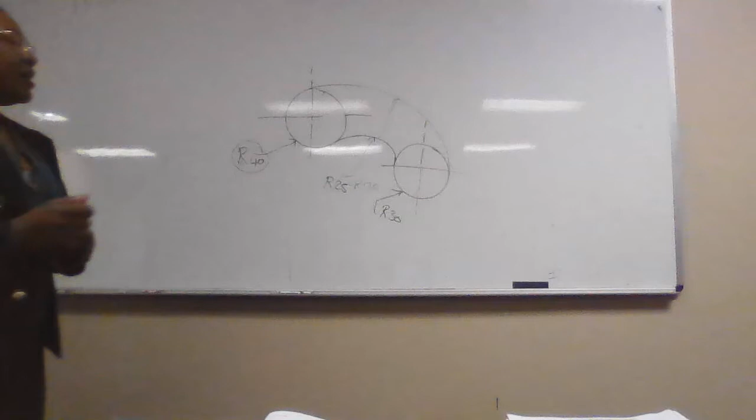We have that circle that will belong here. You open your compass to 40, put here, draw. You will go to that center mark, open your compass to 30, draw.

Now we have two arcs without center marks. I told you that for you to know whether it's internal or external, we have two types: either internal or external. The external arc is an arc that when you complete it, you see this blue one, if I complete it, it was initially like that.

It's touching the two circles externally from outside. So we need to add the radius, meaning the radius of this external arc plus the radius it is in contact with on one side. On the other end is 25, which is the radius of the arc, plus another circle it is in contact with. It's like a person, you've got a hand, you touch someone here and someone there. You are touching two circles there.

So the first part is 25 plus 40, which is 65. Next is 25 plus 30. For all external circles, I think this shape you can now look at.

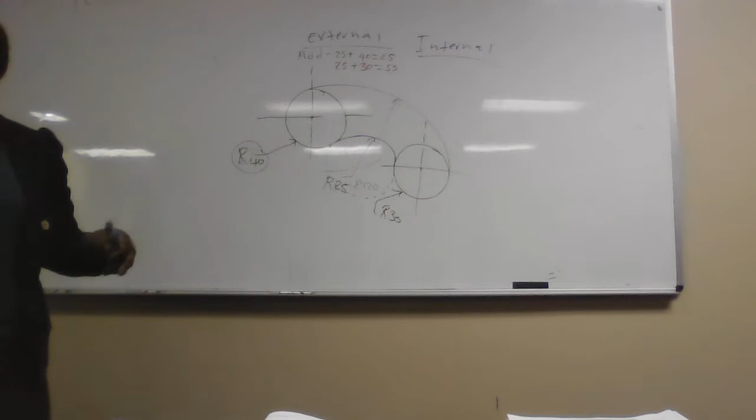Where they meet, that is where you are going to go and open 25, and it will perfectly touch without leaving a gap, without going inside the circles. If you see there's a gap left, or it's going inside the two circles or one circle, it means go back to your calculation, or else your compass is moving. There's no way it can fail to touch. For all your external fillets or arcs, I'm revising, I'm not teaching this part.

For the internal arcs, these are arcs that when we complete, can you see what's going on here? Look at that 120 radius circle. It's going to enclose the other two inside. It's an internal arc, and the opposite is you subtract.

The radius of the arc minus what it is touching, radius of the arc minus what it is touching. So what's the radius here is 120. You are going to say 120 minus 40, what's that? It's 80, right? Then 120 minus 30.

Then you open your compass to 90 or to 80. Put, well, which one is 90? This one? Okay, you open your compass to 80 and put here. Why here? Because that's the radius of the circle I'm subtracting. 90, I put here, I strike. What's this? 80, right? 80 here for this one, 90 for that one. I strike.

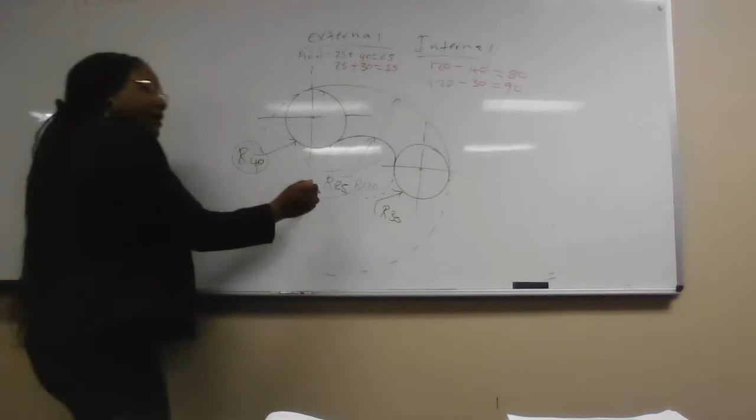And then you come here, open your compass to 120, then you draw. As easy as that.

You say how long this should take us? To copy this one, this is 25 marks, 25 minutes, 30 minutes maximum. You don't finish, leave it, go to another question. Otherwise, 4 hours you will be just wasting time on this one. Give yourself time. Even the one I'm starting tonight also is 25 marks. We expect you to spend not more than 40 minutes, not even more than 30 minutes. When you see that 30 minutes is approaching, leave it, go start answering other questions, because whatever you put there, every line of work is counting in drawing.

We're counting you on neatness, accuracy, correctness, those things. So make sure you don't perfect on one, you will end up going home with one question. And that's the mistake students are making on all the modules.

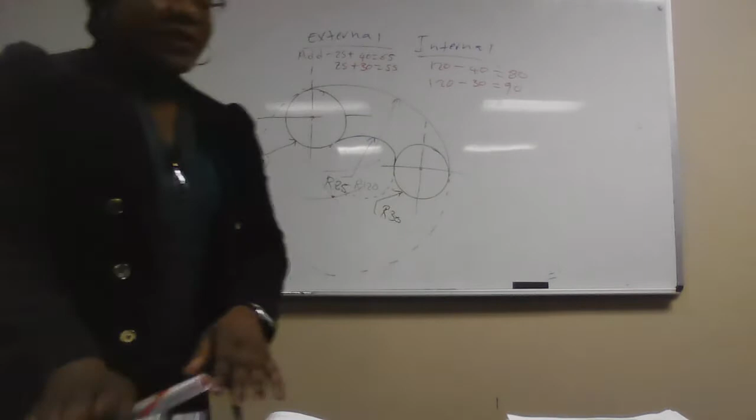It's on number 2. One. Yeah, it depends, but every chapter is coming.

So look at what shape they gave in this paper. This paper is April 2020. All of us, right? April 2020, that shape is just a copy and paste.

But show the construction lines, not just figure 1. What's this figure 1? Diagram sheet 1. I think it's easier than any other.

If you can see, there's circles, there's fillet, there's a hexagon there, which I showed you. I showed you how to do polygons. There's nothing difficult there, it's just do measurements, draw, copy it, and show dimensions.

Examiner will tell you I need 8 dimensions. If you leave out your dimensions, you are losing marks. Those dimensions are also part of the 25 marks. It must be neat.

Avoid erasing unnecessarily, and how you avoid erasing unnecessarily is to start by using construction lines. Clutch pencil 0.3, for those that are learning drawing. If you are an expert, you can use 1 pencil, it's fine.

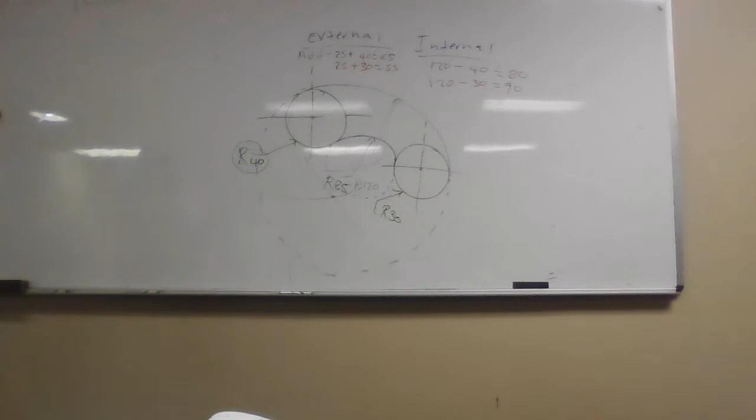They are not arcs, no. The arcs will say radius. Those lines outside are just lines. That makes this easier. The only one you can ask me about is the 13. Can you see the 13 radius? It's an external arc, already you can see 13 is an external arc. Okay, maybe you're asking about the other one, the big one. The big one will be the distance between the 2 circles from outside to outside. We can get that distance. Yeah, they have given 120, that's the diameter of that arc. So the radius is 60.

25 Mahala. Max. I say it's Mahala Max if you know what you're doing. Otherwise...

So last week I started with orthographic projection and we went through a lot. Unfortunately my recorder was not working nicely and I was disappointed because I taught for a long time and then the volume was going, coming, going. But we'll do our best again.

For now, you can keep the papers away so that you listen. I just need us to use whichever will be easier to do. Not the cut ones. Am I meeting you on Thursday? No, next week.

Because I can't go straight to the cut one, it will confuse you more. Okay, yes, we are doing that. But first I must ask, have you done drawing before? Fine, you've never done drawing. Were you here when I was teaching orthographic projection last week? Okay, we'll start there.

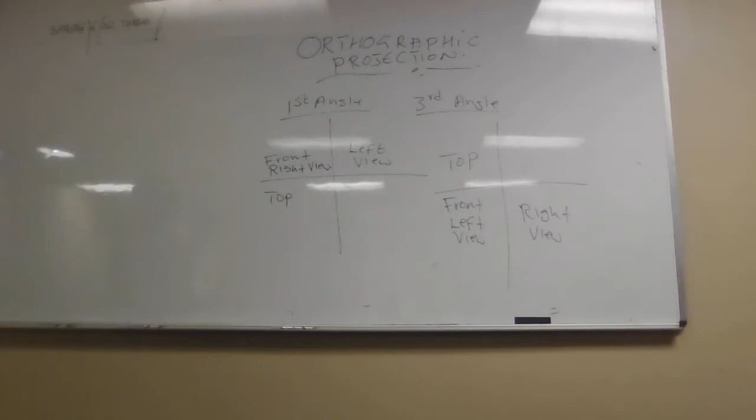Very important basics. I tell you, even people that have done this, doing mechanical drafting, they confuse which one is first angle, which one is third. What I want you to remember is that the examiner can give you drawings in first angle projection, then say redraw in third angle projection. You are just going to swap your views. Front will go to the bottom, because the front is the same, even the appearance is the same.

You will see what I drew last week. I need to use space here. I drew a block in isometric. I made it nice, I put a rib, which is a support. They will give you the thickness. Then I made it nicer, I put openings here. I said this is a drilled hole, and that side same diameter. It was like that.

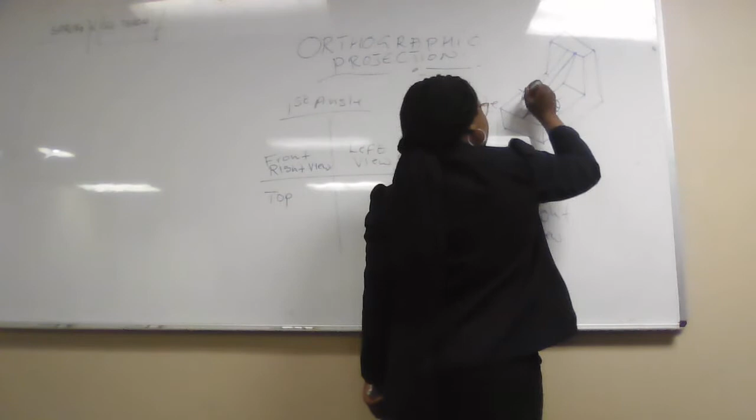The way I've drawn it, if I want to do first angle projection, this is my right view, and it is my front in first angle projection. You will stand on the right hand side of that block, whatever you see is your front view. Then if I need a left view, you draw it on the right. So actually front is not really front, it's actually right, in first angle projection.

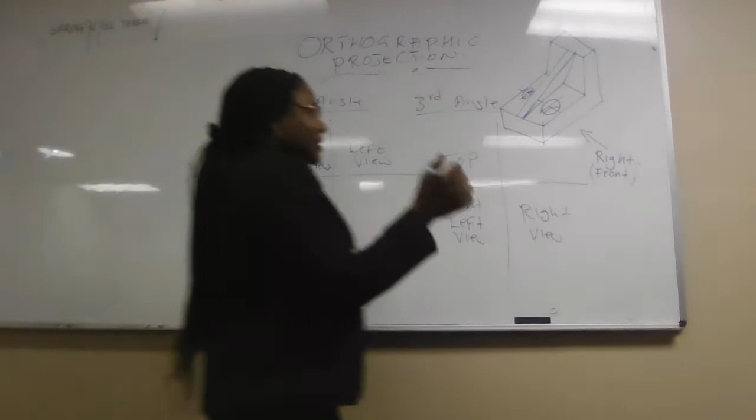Then if we need the top, we go on top. But the same block in third angle projection, I drew it the other way. I said okay, this is first angle projection, what if it's third angle projection? Then I went on saying you could have it drawn that way. The rib is behind, you won't see it. The openings, maybe you see one there, another one hiding. I don't know if you understand. The front has now moved to the left side.

It's the same front, but now can you see? I'm viewing it from the left. And this makes third angle projection - it makes this front view a left view, and it's the front in third. This is first. So you can actually draw the right front in the first, so this one is actually the third.

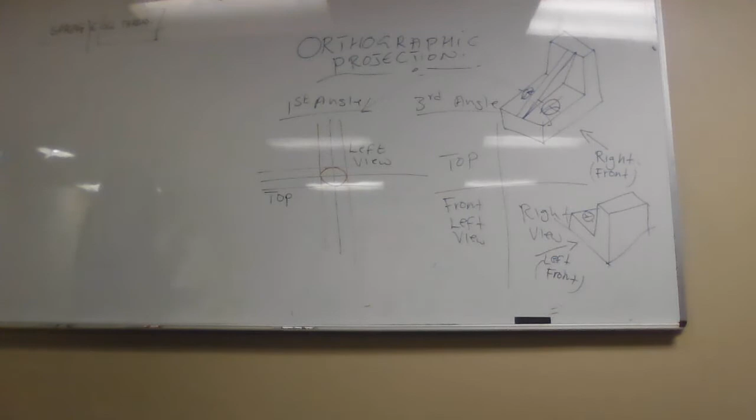Let's do this. You see this quadrant? I'm going to put the front view here, which is the right view. Are you getting all your measurements? What we do, we draw a small circle of diameter 10, then we draw a line, and another line tangential there, and another line here. These red lines I'm drawing are just construction lines that will keep the views apart so that they're not touching each other. Now, if I know the sizes of that front, I'll do it here.

It's the L shape, it's got a rib, and there's an opening here, center line, and hidden details. You see, you won't see the holes there - those holes are going to be in hidden details. Let me get my chart. Are we understanding this? I've done the front view. So now if I want to do the front view but in third angle projection, I'm sure it will be the same.

Yes, will you be able to see those holes from the top view only? Correct. So why? You know, drawing is like - what you see on the top must be reflected in all the other views. If the house has a door in front, how is the door looking when I'm on top? You can't show it here and not show it on the other view.

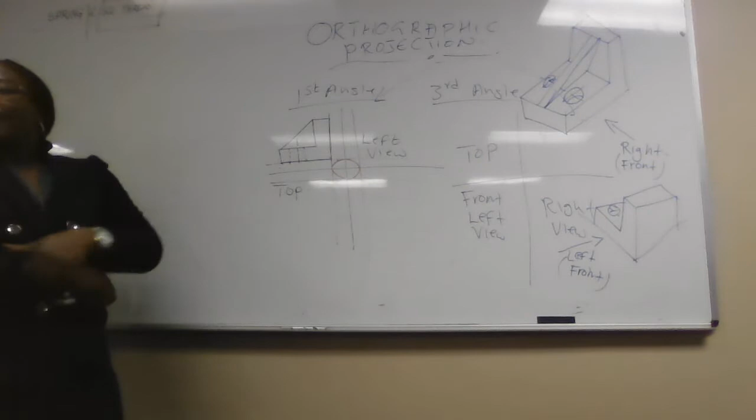What about that one? The other one. This other one, yeah, it's behind. So how do you show it? Then you won't show it in the same diameter - yeah, they're in the same line. So if I see this, I see what is there, unless the diameters are not the same, then I'll also show the other. I think that's the point - if you look at this, they ask how many holes? You can't tell. Immediately I draw the three views, you will know how many there are - that's the point of orthographic. You want to show how many - maybe there are 4. Here you can't know until you do the top view.

Correct. So I've done this top and front view, and I wanted to say that the front view for the left view, look here, left - can you see that it's still going to be the same? Yes.

Same, and that hole there, same. But different position. Now I'll give you the top view.

For you to get the top view right, you project from the front. The edges are the same, you see those edges projecting. Even the holes if you want, and the center line, and that will project.

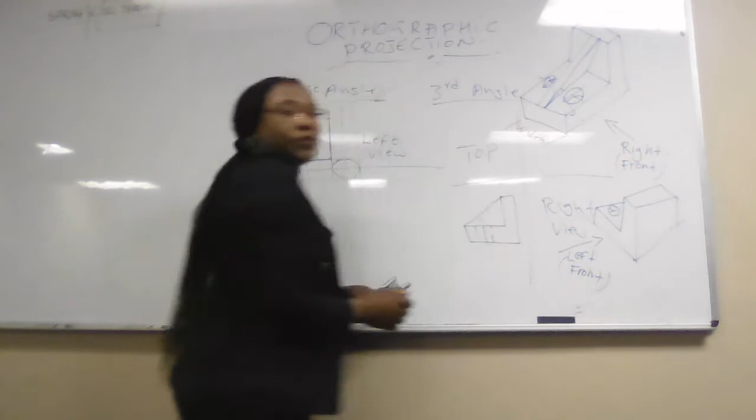Okay, it's fine. And this side here is the width of your drawing, you know that. And that width is viewed here. This is your whatever dimension it is, you know.

Then the rib, okay, I've got that edge which is solid here. The rib is in the middle. Can you see, from the top the rib will be seen like that.

Then the holes now, I need to put them in their correct position. And here.

So what the examiner is going to give you is not that, no, just these two. Project the missing view.

Without that isometric there, because if you're not drawing, you'll be visualizing already. You have created a 3D in your head, and you already can see the left side. So they won't give you a 3D view.

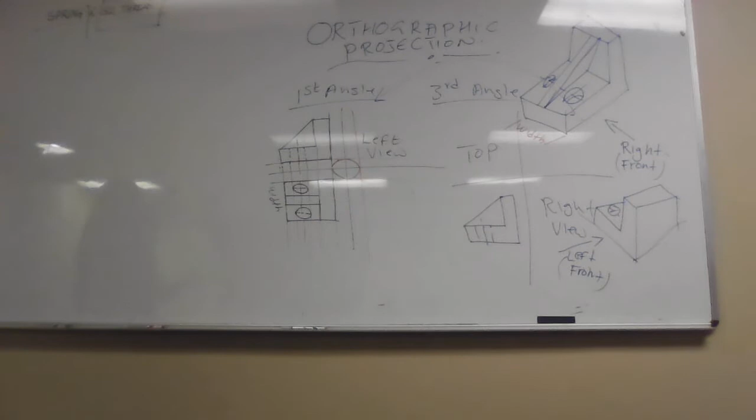I'm now going to project, because I'm teaching orthographic projection. I'm now going to project the left view, not using third angle projection, using first angle, but it's the same way in third as well. Except that in third angle projection, your 45 degrees will be here.

In first angle projection, our 45 is in this quadrant here. 45 degree line. So what we are going to do here is project horizontal lines from the top, from the front, going to the left side.

Because you are learning drawing, those that are learning drawing, it's wise of you numbering the corners. You see those corners, don't make the dots. I'm emphasizing, that's why I'm doing that. If you do that on your paper, it's clutter.

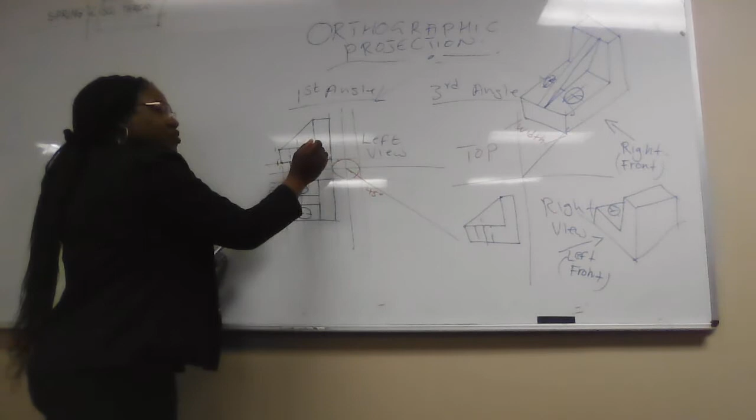I'm emphasizing, but you can say okay, this is corner number 1. It's just below this one. This one also I'll number it 1 because they're on the same edge. You come here and number this one 2, and that one also 2, same line. You come here, you number 3, and that corner 3.

There's a hole here, how can I number it? It's this and that, maybe it's 4, 4, 4, 4. Why same number? It's one set.

You do that and make sure you draw small numbers so that the examiner can't even see. It's light, it's for you. But if you're not drawing, this is not necessary.

Then you come here, all right, there's 1 and there's 1. When I come down here with these projection lines, you can see my arrows there. What is 1? Can you see 1 is this corner? 1, this one also will be 1, this one will be 1, that one will be 1.

In the same line, you go to 2 and 2. There is my projection line. There is 2, there is 2, there is 2, there is 2. 3, this corner is 3, that corner is 3. When we come to a circle, you know we are going to mark 4 and 4.

You mark, you know, up and down. You can't mark in this way because we need to go that way. So it's 4 and 4, again here 4 and 4.

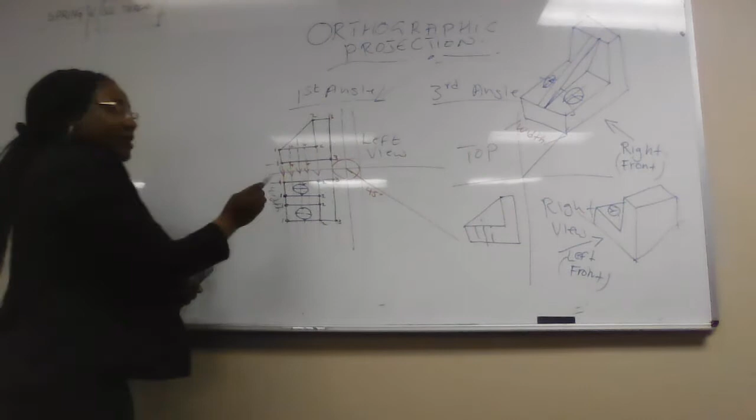Then we start to project. To get the view right here, is number 1 meeting with number 1 coming from that side. Making sure that 1 hits 45, then up, go and meet with 1. Where they meet is point 1 formed for the left side.

The shape will be formed itself. You go number by number, and then the shape will be formed. The shape I'm going to create here is the shape that you're already seeing on that side of your 3D. So let's project that.

Left view, I'll start with number 1. 1 and 1, so go through this 1, passing through 4, passing through 2, and out. 1 at the bottom, passing through 4, 4, 3. There is already a line. Can you see the 2 lines for number 1?

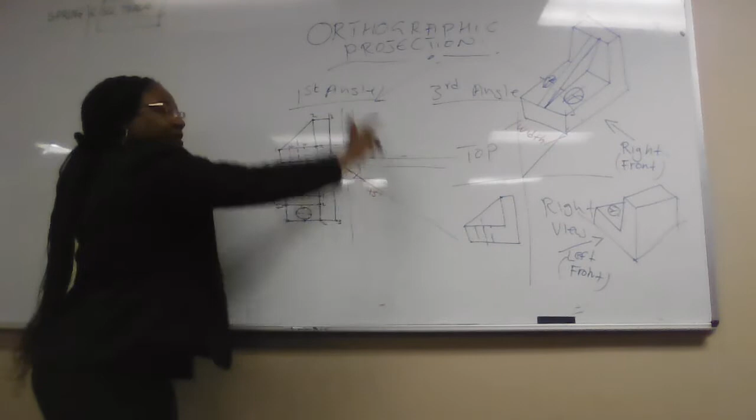You come here, where is 1? 1, 1, 1, 1, fine. Take your lines to 45 and up. 1, 2, 3, 4 lines representing 1. The first one is here, and it goes through 2, and it goes through 3. This line represents 1, 2, and 3.

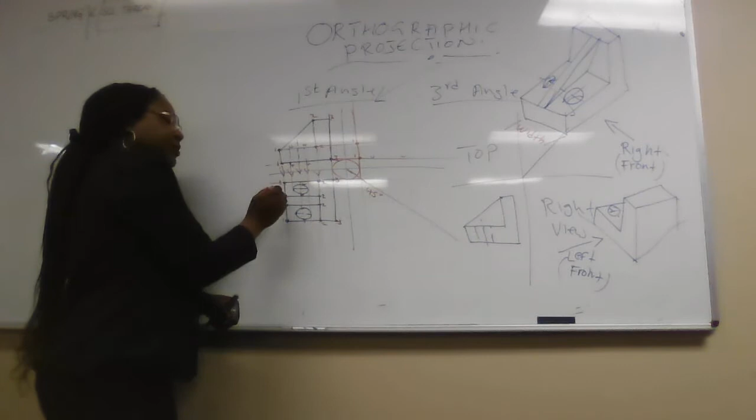So this line will meet with this one here, and at the bottom it will meet with 1 here. Can you see? Go to the next one, this one and that one. These 2 are not for the bottom, I think you can see it's for the rib. Can you see the 2 is for the rib? The 2 is for the rib, so the rib that did not go to the bottom. The rib starts on top.

So the only line I need for 1 is this one. For these 2, I'll go through number 2, out, then up, then get 1 here. The next one here, go through 2, up, get 1 here. You can go the way you use these lines. Why I'm going, because there's also for 2.

You just extend, then it's 1 this side. It's 1 through 2 through 3. You go with 45, there, up. Then it must meet with 1 here and 1 here. It's 1, 1, 1, and the shape is formed. How do you do that? Connect. You have created only the base. This that I've created is this.

With the 2 points for the rib, you can see this point and that point. It's these 2.

Then we go to 2, because 1 we're done. Number 2, there's 2 here, there's 2 here. This line for 2 is still there. 2 here will pass through number 3, and then we take it there, leave it. Come here, look for 2. It's 2, 2, 2, 2. The same lines. So the 2 on top here will go up and meet with 2 here.

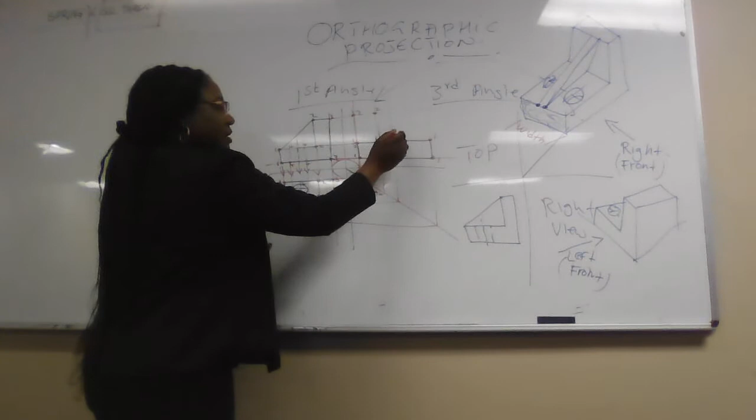That side, this is 1 and 2. You can do that if you want. Next, 2 and 2, you go with that. There's 2 here, there's 2 here. 1 and 2, this one is 1 and 2. 1 and 2, 2 here on top. Then the last 2 here, you go with that, you go up. There's 1 and 2, then all the way up, 2.

Where it meets with the 2, this face you connect. And the rib connects, it's 2 to 2 to 2, you connect. There's 2 to 2, 2 to 2, 2 to 2. You connect. You look at there, there's the rib. This 2 is that, and there's a rib.

By projection, not by looking. So if you know this, that won't be a problem. Because what Rene will teach you is from this to that. Pictorial, there's isometric and oblique, where we take from orthographic to 3D. You're building up the shape, you see.

So what is left here is just the holes. Yeah, only the openings. How do we get the openings? There's the hole 4 already here and 4 at the bottom. Fine, you come here, start with the center line, project the center line, up until 45 degrees, there is your center line. This center line also 45 degrees up.

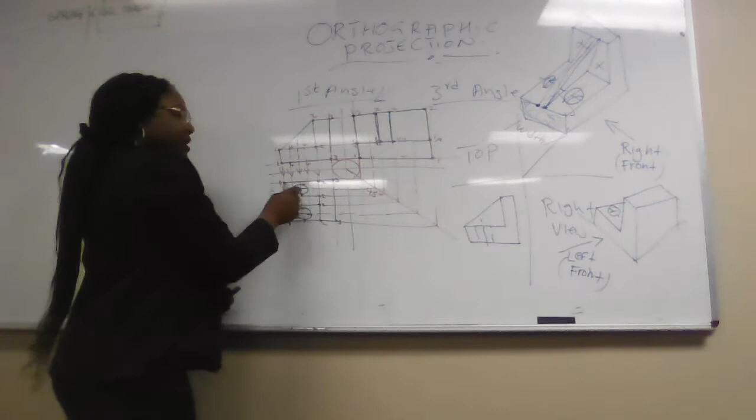So if I need to position this here, I already know that it's a through hole, it's in this thickness, that is the height, or the depth of the hole. Then here, the diameter is from here to here. That's why I said 4 and 4. So from the 4 on top, when it hits there, you go up. From the 4 at the bottom, when it hits 45, you go up. You have already created the hidden line this side here.

This is the center line, this is hidden line. On the other end, same things, 4 and 4. You go with that 4 to 45, up, 45, up. You do a center line there, and you do a hidden detail.

I want to tell you something. Of the 3 views, if you've shown outlines here, there's no way it can be outlined again. It's like you're looking at somebody's face, you see the eyes round from the front. When you come here, I don't think you see circles here. You won't see my eye round. That's the meaning: if you've seen round things in one view, the other views, they'll be hidden details. And that's what it's proving to you here.

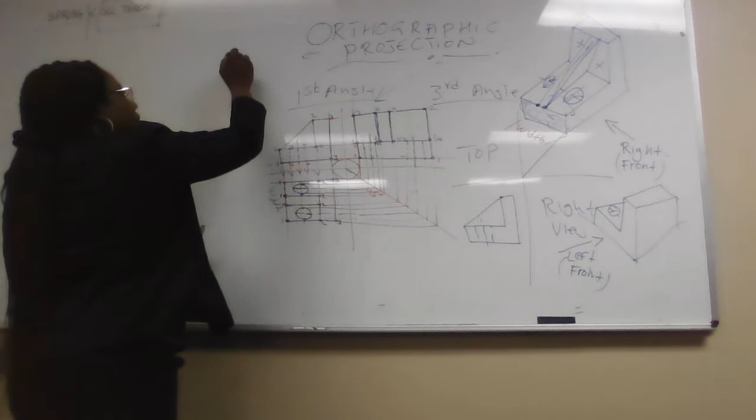It's finished. This is 2-dimension. The main topic of tonight is what we call auxiliary views. It's not this one, but it's all about projection, but they call those views auxiliary views.

Auxiliary views deal with shapes like prisms, pyramids, octagonal prisms, octagon pyramids, squares, different shapes. I forgot them, they're somewhere upstairs, maybe next week I'll bring them. Those shapes are in solid form, that's why this chapter is called solids. If you hear people say solids, solids is something else, they know we deal with a solid shape.

I'll give an example with this duster. This is a solid, but this duster is a rectangular prism. It's a prism. Why is it a prism? It's parallel, all the edges are parallel.

A pyramid is different because a pyramid can be rectangular or square, but these are things you also have to know. Or they can just say it's a prism, which is this one. When I say prism, it can also be an octagon prism or pyramid. If it's an octagon prism or hexagon prism, you have the hexagon drawn.

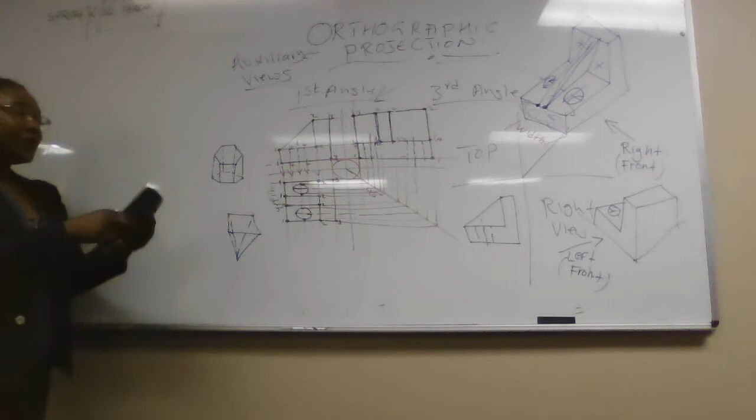It's a prism, but we don't give it to you sitting like this. Some questions, yes, but most times the examiner gives you it tilted. That solid is sitting at an angle of 30 or 60 degrees. Then project the front, the top. The front is always given. Project the top on the left or the right.

This same one can change, I can change this to a hexagon what? Pyramid. They converge to an apex. They can give you whether it's sitting at an angle or sitting flat.

That's what you see in these papers now. So we need to choose one. I don't know which one I can choose that I think is easy that I can do on the board from the papers, especially because there are other people learning.

I didn't want to go through a cut one. The advanced questions are when they cut a solid, where you ignore the part that has been cut and just show the things that are not cut. But we'll see, I looked at 2022, I think it's the one I can help with. Let's see.

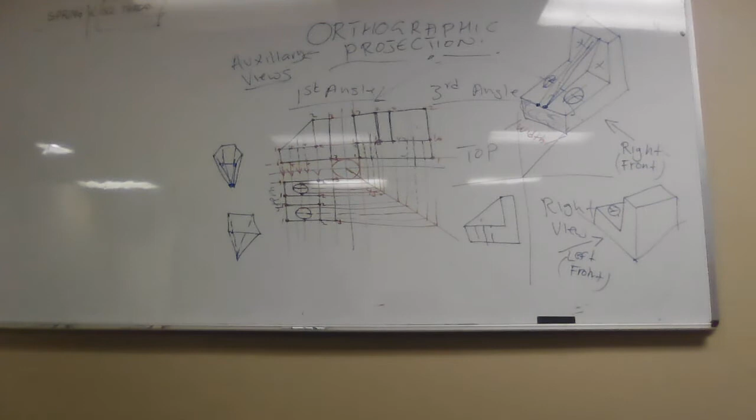What's going to make me do 2022? Because it's got a prism and it's got a pyramid on top of it. I know it's cut, but we'll start by dealing with it without cutting, and then I'll come and cut it. If I show you this one, you'll be okay. But we'll do even next week, I still need to do one more, then you can practice and you'll see from there.

So this is question number 2 or 3, it's 25 marks. Just to copy the 2 views given is 5 marks. But you really have to know what these 2 views are. There's always a front view from the 2 views given. The other view is called the auxiliary view.

The auxiliary view is a shape that determines how the solid is looking on the base, on the sides. So if it's an octagon, you see like the way we can see there, there's a hexagon and there's a square pyramid. The square pyramid is cut, and it's sitting on a hexagon prism. How do I know it's sitting on that? You can see there are 2 shapes there.

There's no way you can draw your front before you draw your auxiliary shape. The auxiliary shape shows how this looks on these faces. Is it a triangle? Is it a square? Is it a what? So you always have to focus on the auxiliary view first.

And that is what we draw first. When I was teaching chapter 1, I emphasized, guys, don't think I'm playing with the polygons. I was doing the set squares here, showing you which one is what. It's because of this chapter, because if you don't know the concept of those polygons, you can't get it right.

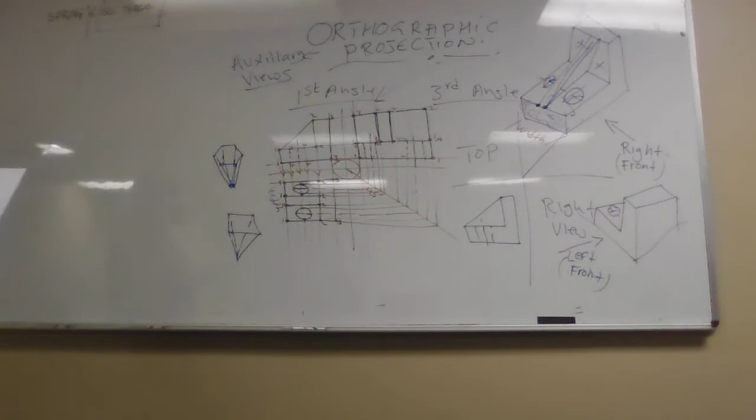So I'm going to stick to first angle projection. I don't know, I like it too much. But it's not that it's every time going to be in first angle projection. Let me read this question. Check the question.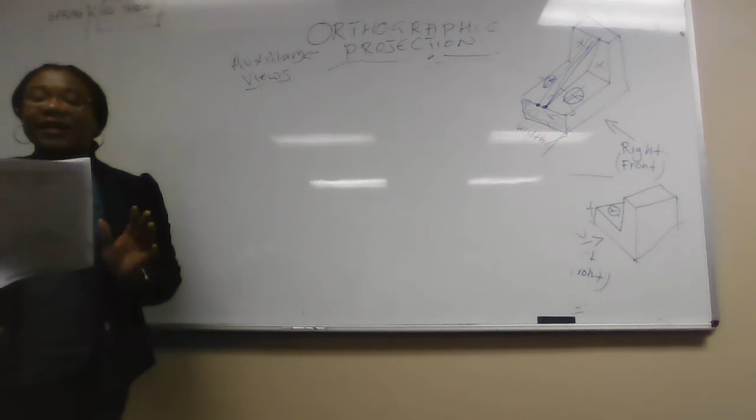July 2022. I'll go to question number 2. Okay, question number 2 says that figure 1, diagram sheet 1 attached, shows a truncated square pyramid on a hexagon prism, tilted at an angle of 45 degrees in the horizontal direction. Draw to scale 1:1 and in third angle projection.

So I'm forced to do third angle, yes, because they said third angle projection. Fine, the following views. And I want you to remember that whenever they ask for third angle projection, they won't ask for a left view, because the left view is the front given. The front will always be given. And I said in third angle, the front is a left view. So unless the question is contradicting, if they just ask for left view and they say third angle projection, it's wrong because the front is a left view. They can't ask for left again.

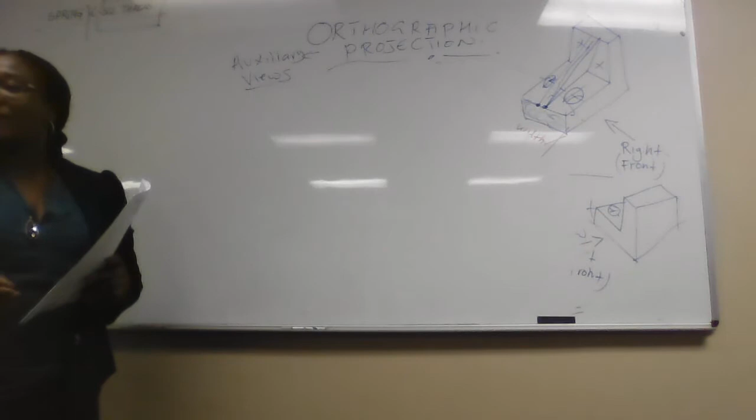The only question that will ask for a left view is if it's in first angle projection. So we are going to do in third angle projection. We need 2 views. First, you copy the views that are given, which is the auxiliary view and the front view. You get the point: the auxiliary view is those hexagons and the square. And that's where I'll start with.

But how do you know where to draw on the paper? You need to plan. Planning means understanding whether it's first angle or third angle. So it's third angle, where are we drawing that? Bottom corner, bottom left, because it's the front and auxiliary view. And I told you that third angle will do this: top, front, right. Third angle projection.

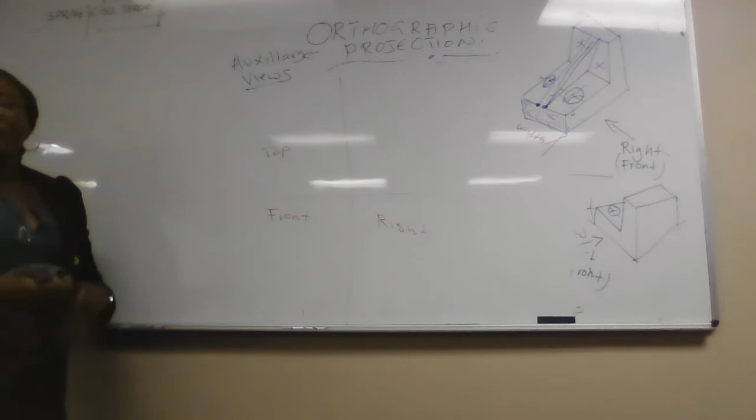So what is given there will be in this quadrant, together with the auxiliary shape with the front here. Then we'll start to project and get whatever is being asked. Very important to understand the question. So if it was first angle, then I was going to draw in this top quadrant, I was going to leave space for my top view. Many students, due to poor planning, go into the exam room, and after 1 hour they're done but running short of space.

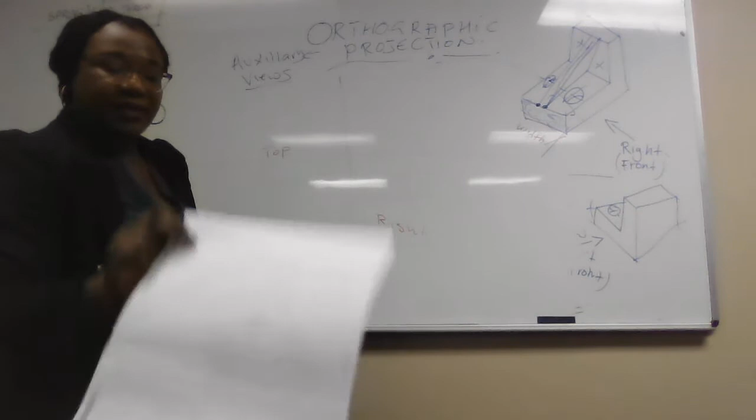You can't start. You've wasted time because you didn't plan, you didn't understand the question. So let's just copy that. I'm going to leave small space up and leave a bigger space down for my front. Let's say we close here. It's fine. Look here, they are saying 45 degrees. It's tilting to which side? Take the paper. I'm going to draw the hexagon.

When I was teaching hexagon, I told you that the side length of the hexagon is the radius of the circle. That's what I taught, and that's what is in the book. So 45 degrees, maybe this center line, 45 degrees to the horizontal line. Then at a convenient space here, you need to plan that my front will come and sit.

I'm going to do my auxiliary view here. So let's say I put my other center line at 45 again. If this line is going at 45, this is 45. If this one is going at 30 degrees, the other one will go 60. They must add up to 90. So it's 45, 45. Then after that, open your compass to 35 - can you see the side length is 35? Hexagon, radius 35. Open your compass and draw the circle.

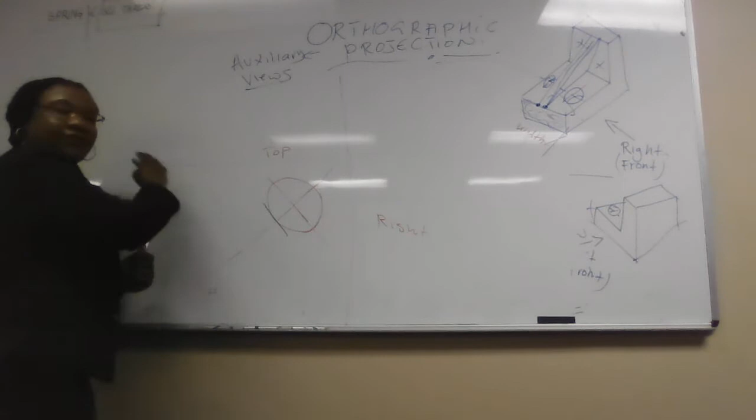After that, I don't have the set squares, but what you are going to do, you need to draw a line here. Check - this line must be at an angle of 45. And measure the length of the hexagon, half, half, so that is 35. It's half of 35 and half of 35. We do the same here. Straight there.

Next, 60 degrees set square. I don't have the set squares. I don't know where they are. You're supposed to have 2 of them.

We're saying that this is going at 45. Can you see? So when I said last time that it must be 60 degrees, can you see the way I'm holding? Those that never did drawing must check.

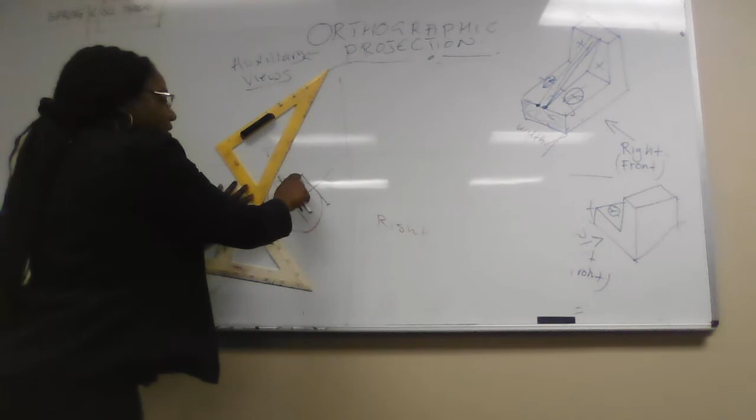60 degrees to the 45 line, to draw a tangent line here, and another 60 degrees, 60 degrees, 60 degrees. So here, I'll just flip this and rest it here and do 60 degrees. Then I slide to the other end and do 60 degrees, making sure this is 45, because that is the angle given to us.

Okay, so I'm going to just draw those. We know that we use those set squares, 60 degrees. Make sure it's tangential to the circle. What I mean is it must be touching the circle on the tangent. This side, tangential to the circle, 60 degrees. On the other side, 60 degrees. On there, 60 degrees.

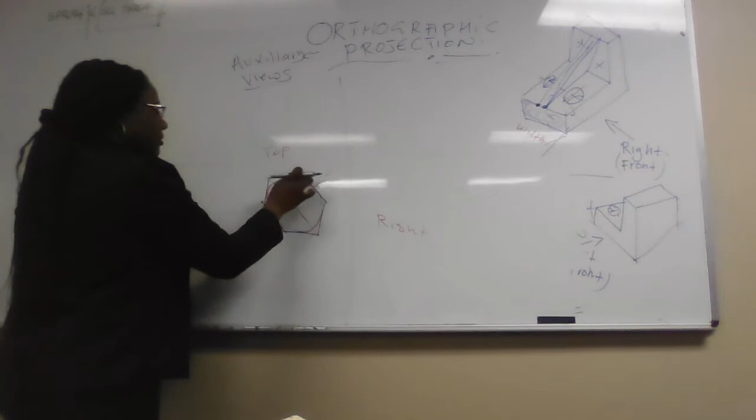Why did I use this method? Why I use this method is because the center line is passing on the flats, though it looks bent. It's passing on the flats halfway. Okay, are we clear there? You can go back to module 1 and learn the solid, the shapes of polygons.

I'm going to project. How do we project? You project these corners and that corner at 45 degrees. This one is passing through this one. This one is together with that one, and then that one. These lines I'm drawing in red must be construction lines.

It looks very tilted, like not 45 degrees. You know, it's a freehand sketch. It looks too tilted, but I'm gonna fix it. Then, what are we doing there? You are drawing that base, ne? You know the hexagon is the prism at the bottom.

That one here. So the lines that you have just drawn, make sure that at a certain position, maybe even here, I'll start here where there's space. 45 degrees, 45 degrees. And then you outline the edges. This one is a center line.

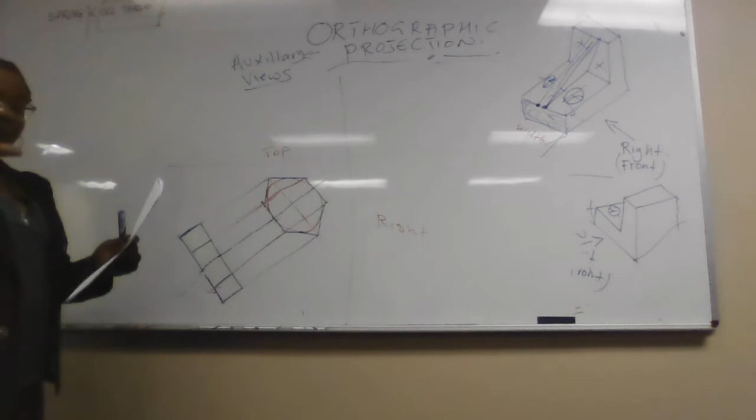38. When I was teaching, I said the side length of a square is the diameter of a circle. So you draw the circle of diameter 38 inside here. So let's say our circle is this one. I mean diameter what? 38. After you draw that of diameter 38, I'm gonna use black for the inside so that you can see.

You can see the corners. We're going to use 45 degrees from that corner outside. You must check if it's the one for outside or the one for inside. It can be inside or outside. Everything that is just like that, and making sure that it's touching the circles on the flats.

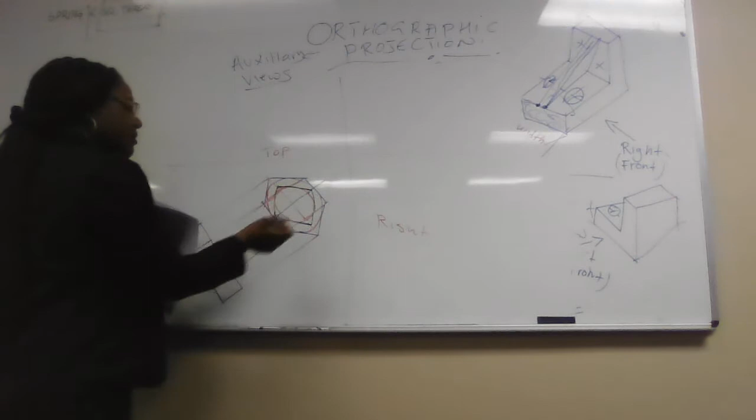But I'm sure this one is across corners. Can you see the center line? I think it will be inside the circle because it's on the corners. If it's in, yeah, it is across the corners. Please fix that, the square will be inside. It's from here 45, 45, 45.

Why am I choosing this method? Because the center line is passing where? On the corners. After you do that, it has been cut. You need to know where it was cut. Though they didn't specifically give where it was cut, we need to do it here from the front.

So at the front, you're going to project that to the bottom. I think it's a bit outside. Yeah, I'll try to make it outside. It's somewhere here and somewhere there. That's where it starts. And after that, you're going to measure 80 length. Can you see from the bottom?

Is 80 millimeters to the apex. So if that is my apex and it's 80 from the bottom, then I'll connect this to there before you even cut, and connect that to that. Then the other corner is this one in the middle, which is going that way. What is next? That 45 degrees, can you see the 45 degrees line? It's where the cut is. So they say that it was cut maybe here, straight there.

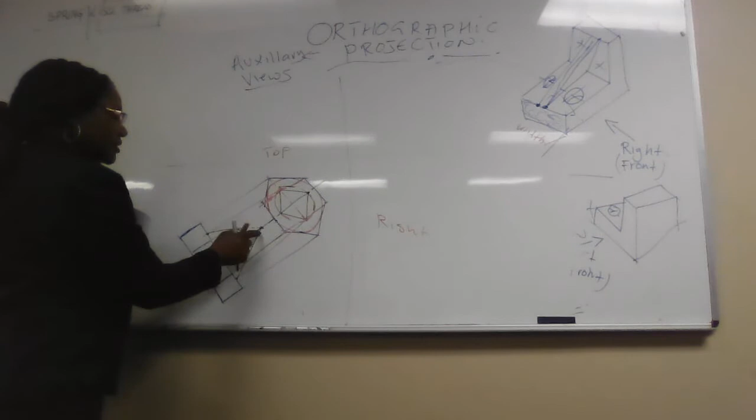That is how it is cut. I'm going to remove a cut, like that. Just assume that piece is not there, it's been chopped off. But they have given you exactly at the position it was cut. Can you see the 45? So I don't think it will be a problem there.

Fine, we have copied that for 5 marks to copy, and that 5 marks will mark you on accuracy, neatness, correctness. You can even get 1 out of 5. If it's dirty, it's not correct. Just that 5, now we need to fight for 10.

10 here, 10 there. And how do we get 10? Those that were here last week, Tuesday, I said there's an important center line on your auxiliary shape, which we use, and I'm using green line here. Center line, this is the one in green that I called the Y line last time. And how do you know that it's this one that is important? Because there's also this center line on the auxiliary view. There's this center and there's that center.

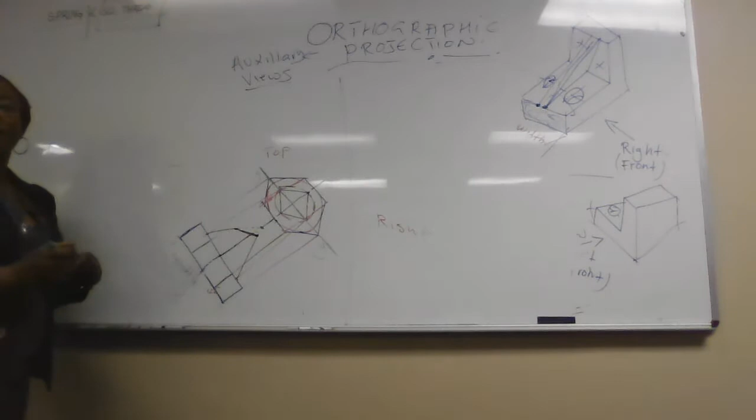The one parallel to the width, you can see this is your width, ne? Yes, I always say the center line parallel to the width is your Y line. And then when you look at this question the examiner gave you, can you see the XY?

It's the same line I'm talking about, but my method is to work from the middle, to work from the center, and it's quite easier than working from outside. This is the very line I'm drawing there in green. But if you've done drawing, you'll see that it's much easier, because many people from matric say that one is long, but this one we work from the center. When you work with this one, you work from left to right only. But the method is similar, you will see.

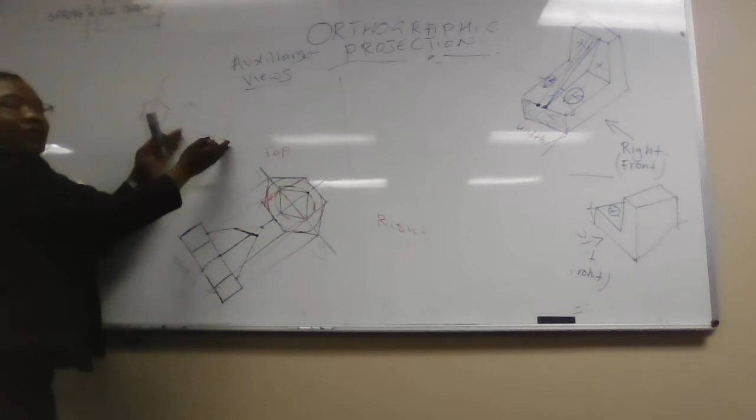So that XY line, it's this one, but please I don't work with it outside. I move it to the center of the auxiliary shape. And even if the object was facing here, maybe sitting like that, I was going to take this as my Y line. Why? Because that is the one parallel to the width, not to the length. Just remember that, and once you locate your Y line, this topic will be easy.

How do we do it now? I'll start with the bigger solid. Which one is the biggest solid here? The bottom, yes. We are going to number the way we did. I can say okay, I'll start on number 1 in the center. Then I can go to this corner, that corner I can say 3, then that corner I can say 4. Because this one and that one I can just say 1 and, if you want to 4, 5, let's go that way, 6, it's up to you.

Or you can say 1, 2 and 2, 3 and 3. It's easier that way because it's symmetrical. So I usually say, if there's 2 here, I put 2 on the other corner. If there's 3 here, I put what? 3 on the other corner.

Once you number, bring the numbers, come here the way I did on the previous one. I went straight, this is 1. When I come straight down, which one is 1? It's this one and that one, 1, 1. There's 2, straight with your 2, where is 2? It's taken us here. If you follow your 2 nicely there, it's the one bringing here 2.

And at the bottom, 2. We are talking about the outside one first, not the one that is even cut. Okay, then 3, there is 3, and there is what? 3. Then it's 4, there is the corner for 4, there is the corner for 4.

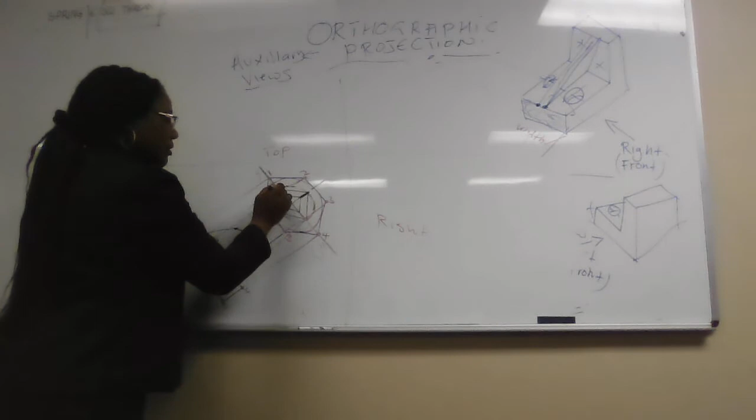Fine, I'm not talking about the black one, let's finish with the bigger solid. You know, the way they get confused with this one is when you take lines from all the solids going in one direction, it will confuse you. Deal with solid by solid, start with the biggest one, finish. Even the previous one I did, I ended with the holes because they were the smallest ones.

So in here I'll start with the base. And they want us to do what? Third angle projection, meaning that we are looking from the right-hand side.

Right-hand side of your front. This is your front view. Students are messing up, they go project the auxiliary view. No, auxiliary view is just to help you get this and to help us mark. You'll see how I use the auxiliary view for marking. Only for marking. So for the right view, you are looking from here.

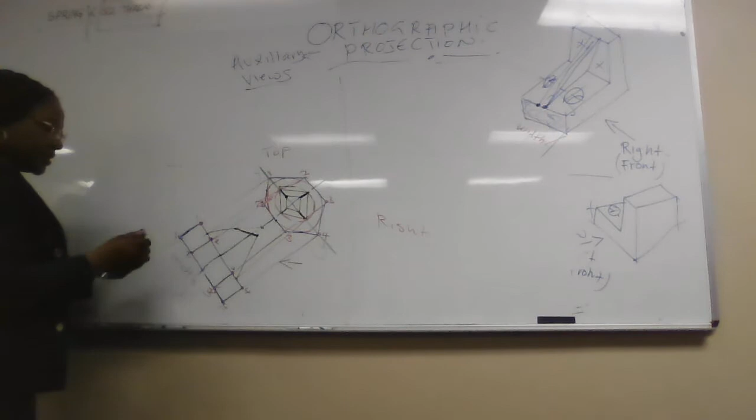I want you to tell me which of the 2 edges of the blue one, this top edge or the bottom edge, will be visible to you if you are looking from that top one. You agree, the top edge. But remember, even though I'm drawing this edge here, it is a hexagon when you look from that side, so you have to show me a hexagon there because you're looking now on the face of the hexagon.

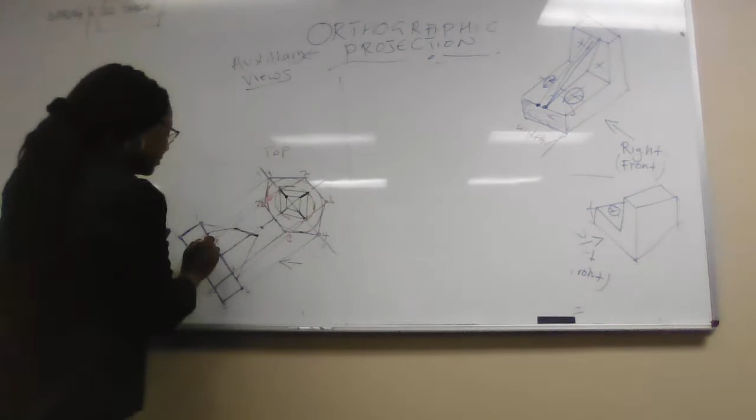But how? Yes, we know it's the top one. So we focus on 1, 2, 3, 4. You agree? We take our construction lines that side: number 1, go that side, number 2, 3, 4.

Then, at a convenient space, create your Y line anywhere where it's free. Y, 1. Make sure that these lines are construction lines. The red lines are construction. I'm just outlining so that they see on the recording.

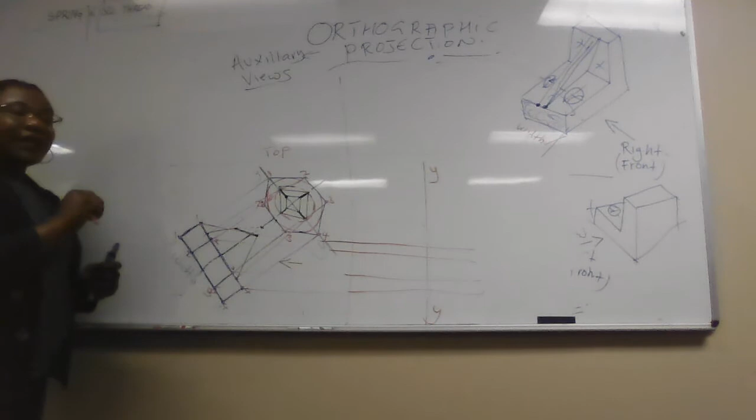Now, to start marking, to know where number 1 falls, come to your auxiliary view and make sure that you refer to the Y line. That's why I said the Y line is important. So when I talk about this one, it is this one. Is it on the Y line or away from the Y line? On. So when you go with number 1, mark on the Y line.

Then we go to number 2. We know that 1 goes to 2, 1 goes to 2. Yes, that is this point. So we need 2 points representing 2 there. But these 2 points, how far away from the Y line?

You take your compass perpendicular to the Y line, that distance. That distance is the distance you're going to mark on the right and on the left of the Y line. And then how do you know that this is right and this is left?

You look at the Y line the way we are looking. You see the Y line, this is the right-hand side, can you see, of the Y line, and this is the left-hand side of the Y line. So any corner that will be on your right here must be on the right there.

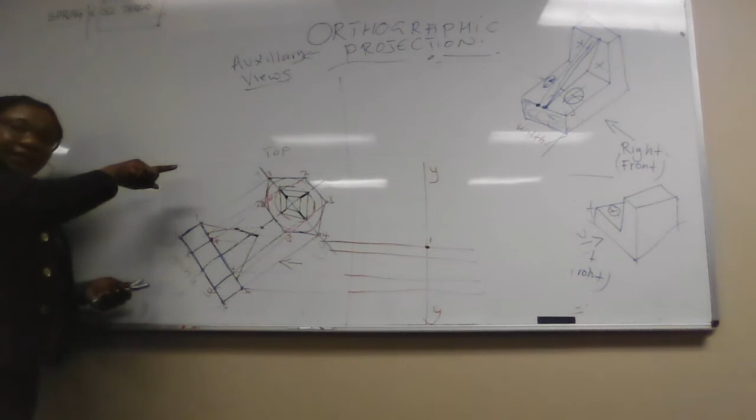If it was facing this way, I was going to say left and right if it was facing the other way. If I was looking from the left side, I am looking from the right side, so it's right side of the Y line, left side of the Y line.

You take that distance with your compass, you come put here, you mark 2, you mark 2. It's 2 on the right and 2 on the left. It's that 2 and that 2.

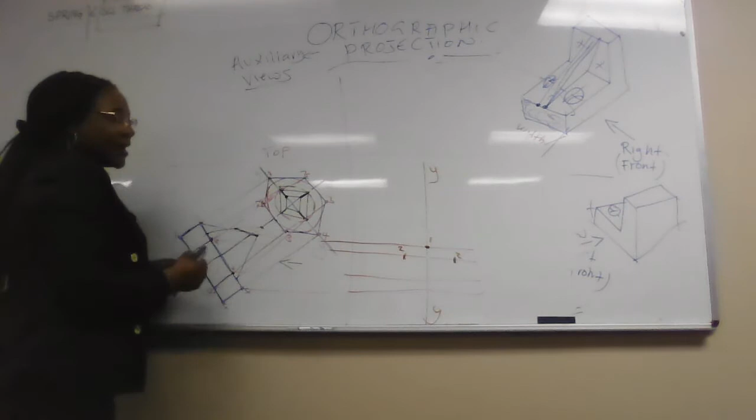Then we go to 3, this 3 here. We have already taken the line there, but where is 3? Also the same distance, can you see, that same distance, so it's just below 2. So you can either take that distance, otherwise it's the same. If you know, just come and align. Okay, so 3 is here, below 2.

And the last is number 4, which is on the Y line. There is 4, if we use it straight there.

And you agree that you are going to see all the edges because you are looking from here, and this piece that is sitting is smaller. It's smaller, so there's no corner that is hidden. That prism, the pyramid, is smaller, so I'll see how all of these are connected together.

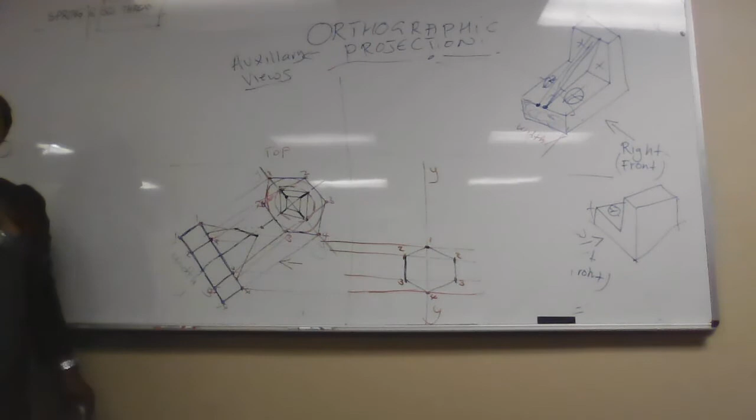And that's what you do there. You come with your ruler: 1 joining with 2, 1 with 2, 2 with 3, 3 with 4, 1 with 3, 2 with 3, and that one. You see the shape, it's the hexagon shape. But we have only done the top edge.

Now we need to do the bottom edge. But when we come to the bottom edge, you must be very careful there, because half will be hidden, half outlined. That top edge was fully outlined. The bottom edge, one half is hidden, one half is outlined. Which half is hidden, which half is outlined?

You go again here, looking at where you are looking from. Can you see we are looking from that side? I think I must stand. I'm looking from, if I use this main center line, do you know that this side is right-hand side, this is left? That's how you are going to see it. In fact, it's just this half, let me use black, that you are going to see.

This black half - why am I using this black half? It's the right hand side half. Even if I don't go there, I'm standing where I am. The right half, because we are looking from the right. So I will see how 3 joins with 4 and how 4 joins to 3 up to the half. But how 2 goes to 1 and 1 to 2, it's on the other end, on the left far end. So you need to know which one. The way I'm standing like this, it's right, left. You agree? So the right half is outlined, the left half hidden details. If we are looking from the left, it's the other way around.

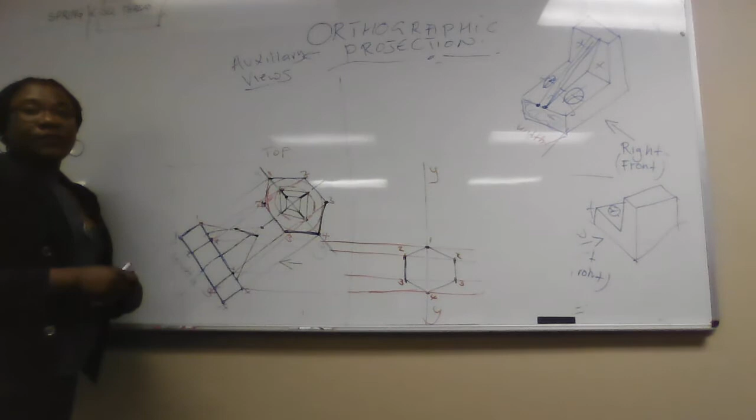You follow the main center line, not the Y line, the main center line. The main center line says this is your right hand side. If I put the line in the middle, right, left. So the right half is what is going to be solid.

Okay, so let's project 4, bottom now. 4, 3, 2, 1 at the bottom. 4, you go horizontal line straight. 3, and then 2, 1.

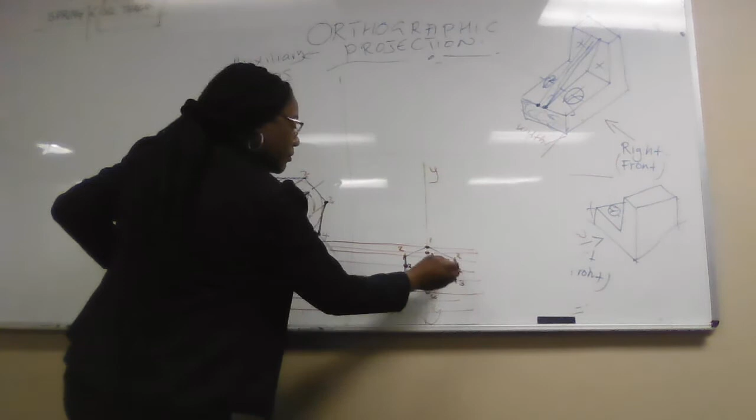Marking, you either relate to those numbers that are there or you come back to take measurements. It's easy. This one here will just be below 1 name. You see here, below this one here, this one here. This 2 here will be below the 2 that was already marked. So I'll go with this line for 2 and it's here, below that 2. And the other 2 is here, below the first 2. 3 again below the other 3. You come here, you extend, there will be 3 here, and then mark 3 here. We are at the bottom edge, and then it's 4, which is below the other 4, and it's on the Y line. There is 4 here.

And I've already mentioned that we are seeing the right half. Okay, you are going to come back here. You will see how 4 goes to 3. And then 3 to 3, it's a vertical line. You will see it, how this 3 joins with that, that is solid. 3 is acting like almost in the middle. There's no way you can have a hidden line on the outside edges - drawing doesn't allow it. There's no way it can be hidden here. So 3 to 3 is a solid line. And that 3 to 3 here is solid line.

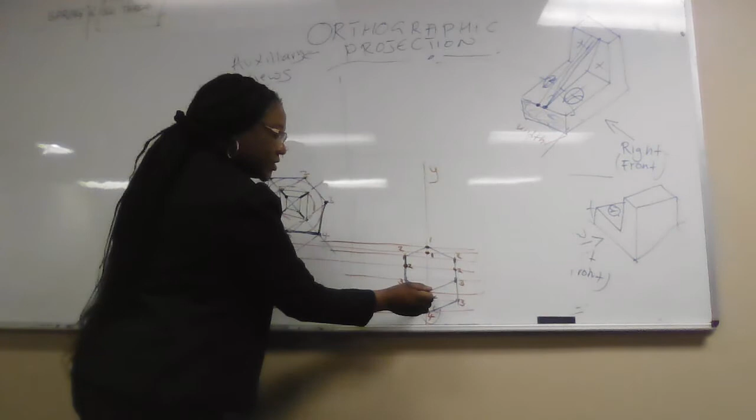What else is solid? Because we are looking from here, it's 4 to 4. I am looking here. In other words, I'm saying this, that, being that is the right half. I'll see how 4 goes down to 4, because I'm looking from here. And I'll see how 3 goes to 3 and how 3 goes to 3, which I've done, 3 to 3, 3 to 3. The next one is 4 to 4.

But I'm not going to see how 1 goes down to 1. It's behind, it's on the left end. We are looking from the right side of this shape. So 1 to 1 is what? Hidden details. Then again 1 to 2, 1 to 2, hidden details. That is the left half, from this 1 to this 2 here. Hidden details, and this piece here, hidden details. Then how 3 goes to 4 and 3 goes to 4 - there we have done 3 to 4, 3 to 4, it's solid.

You have created the prism. Now you need to create the pyramid, which means the one that's sitting on top of that one, the black one.

With the pyramid, what are we going to see most when we are looking from the right hand side? You can start with the bottom. Bottom numbers, which one? You have this point, you have this point, you have that point. You see the 3 points for the square pyramid. You start at the base where it is sitting before you go to the apex. The apex is chopped off, but it's very important - we need it there. Though it's chopped off, you need to project it. Why? Because it will guide us how the lines are going to start from the base going to the apex.

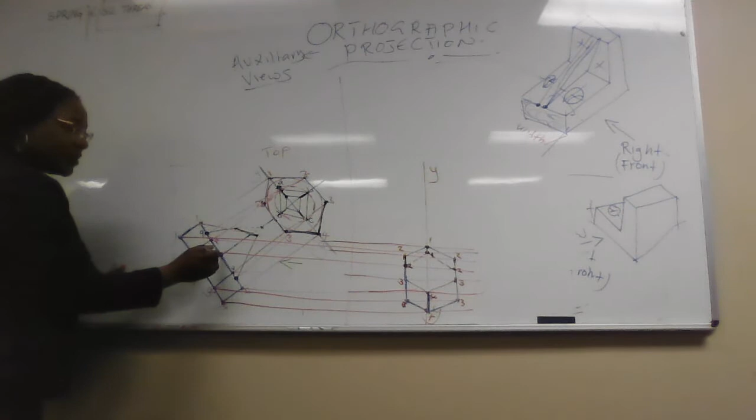But in any way, I'm going to start with that, and I'm going to say this is A, B, C, D. Can you see what I've done? I'm not using numbers just to avoid confusion. So if this is A, you saw I brought this line down here. So this one is what? A. This is B and D. When I bring this line to the bottom, it's this point here, B over D. And then we have C. When you come straight here, you get what? C. Can we see the points?

After that, you can take your apex horizontal line. There is the apex. Avoid this - you need to push it far. This is not allowed, like where you project and draw through the auxiliary. Fine. How will I know where A is here? I need to project A with the horizontal line.

Okay, I need to project B and D. Horizontal line, let's say it's lying there for some reasons. I need to project C.

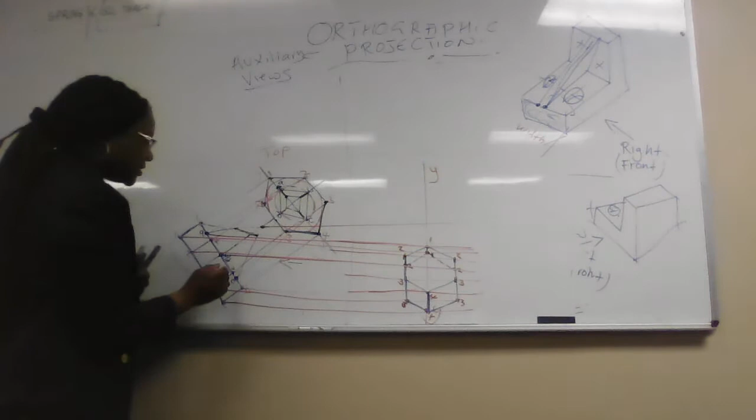Those are the 3 lines, to know where they are back here. Where is A? On the Y line. So when you go with this line for A, you come and say, oh, A is here, coincidentally with 1 is fine. Where is B and D?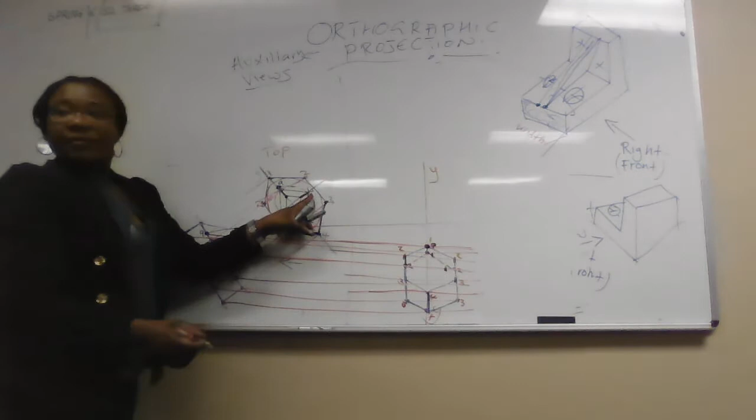You take your compass again, perpendicular to your Y line. Which one is on the right? B, right of Y line. D will be on the left. So that distance you mark, you go with that line, you come and mark on the right here, there is B. Right of this Y line is right, left. So we mark B and we mark D, same distance.

Why? Because that distance here is the same distance here. And the last point is C, which is on the Y line. When you go with point C, you just go and mark on the Y line.

And we are going to see only the right half. Why am I going to see the right half? I'm talking about the right half of the main center line. I'll see D to C and B to C. I won't see how A goes to B and how A goes to D. It's on the left half. We are looking from the right side.

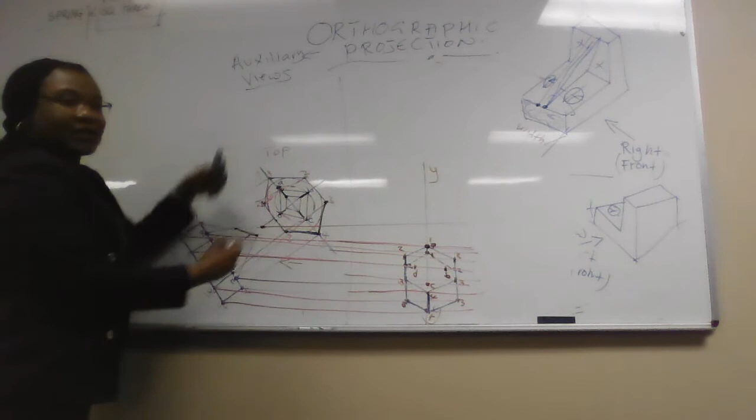And that's what you do there. So we'll see C to B and C to D. But from here to A, hidden line. From there to there, hidden line.

Now those corners, there are 4. Where are they going to? Apex, yeah, there. But we'll chop them at their points. For now, you need the construction lines going to the apex. So I'm going to go to D and draw a line, construction line, and B, construction line, and A and C, they are already there.

How will I know which one was cut where? Like C, as it was going to the apex, it was cut here. Can you see at the corner where it was cut? Go with your line at that cut, you go with that line, and then make sure that you go and get C where it was cut. If you follow that line nicely, this is C going to the apex, it was cut here.

Which is, maybe if you draw it accurately, I don't know if it's going to be a horizontal line, I think it should be. Then when you come to this point here, it's for B and D. Can you see? The cut for B and D, you take your line there. Then D and B, as they are going to the apex there, they will be cut with that line. You can mark where, maybe here and there.

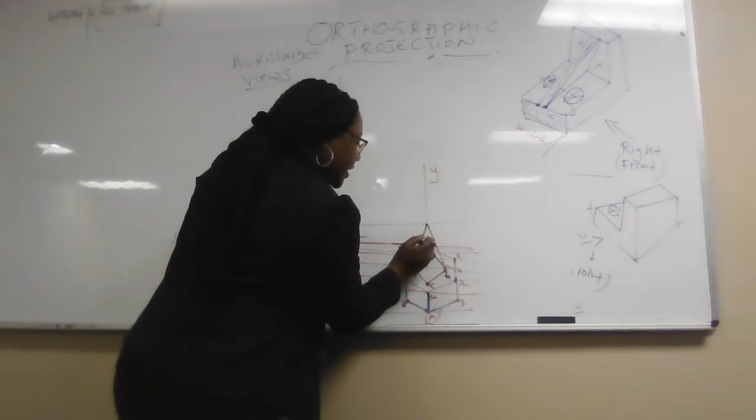So all your 3 points are lying in the same line. I'm not going to force it, and you know it, this question. It has come before, not in this year, some years back. So the memo for that one was just that C was here, B and D was here, A was here.

Then it was cut here, straight. Then you outline that, which is B or D, B also you outline. C to the apex, you will see this, there you will see, because you are looking from right. You will see how C goes to the cut. You will see how B and D are going to the cut.

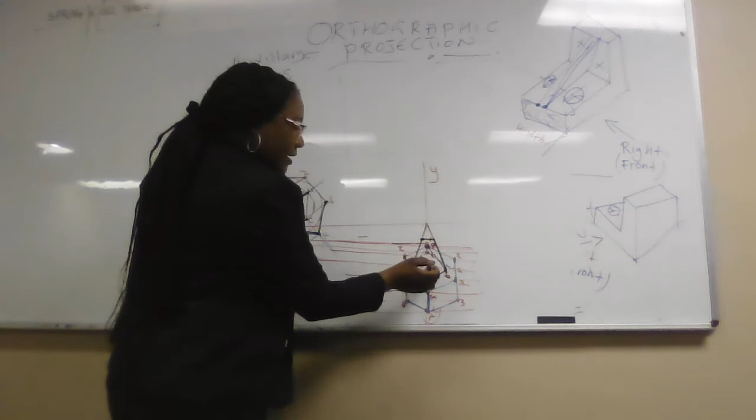But you won't see A going to the cut, while A is on the far end, behind, on the left side. So this point A to point M, this is our A here, with the other A at the bottom, this is the one on top. It's going to be this point here. There will be A somewhere here. It's going to be a hidden detail. But C to C here is solid.

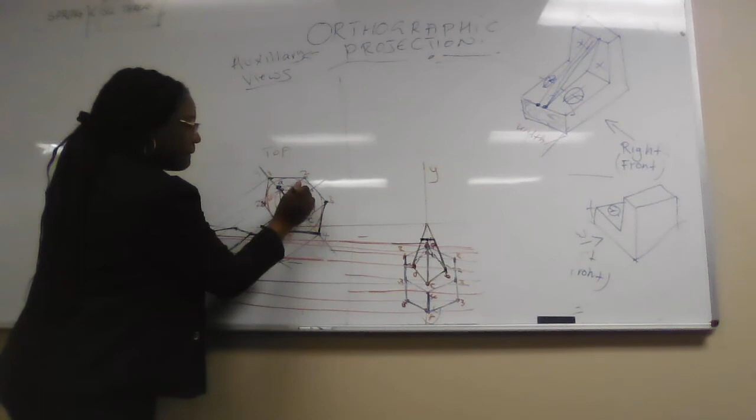This one is a solid line. You know why I'm making it solid? Because it's near the eyes. This line here is the right half. It's this C going to C here. This D going to D on the cut, I'll see. B going to B, I'll see. The only one I won't see is the one at the back.

You see how many lines are there? Too many lines. But the good thing is that once you get this right, it will be easy to get this shape here, top view. How is it going to be easy to get the top view? You are only going to put your 45 degrees line here. Take your Y line to the 45, bring it here. This is the Y line on the top view.

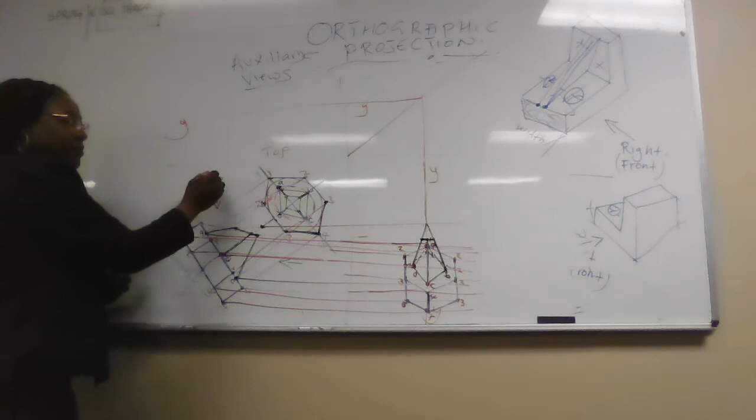The way we started with the base is the way we are going to start here. What am I doing? I'm looking for top. So if I'm looking from the top and I'm talking about the blue shape, which is the pyramid, between the top edge here and the bottom edge is fully visible from the top. Between this edge and that edge is the top edge. So you are going to project from there, from the top edge first. Number 2, vertically up. Then 3, then 4.

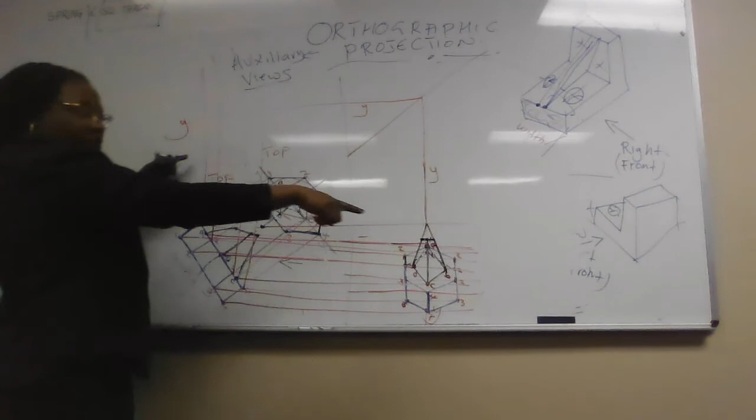What next? You either use marking or you use that one. If I've come with number 1, this is number 1 on the top edge, that's 1. Where was 1 here? Oh, 1 was on the center line. So 1 is here. You come, you mark 1 where they meet. You see what we call projection. It's 1 from there versus 1 here. Where they meet is a point you have created. Otherwise, you can still work with the marking. There is 1 on the Y line. There is 1 on the Y line. Done. You go to 2.

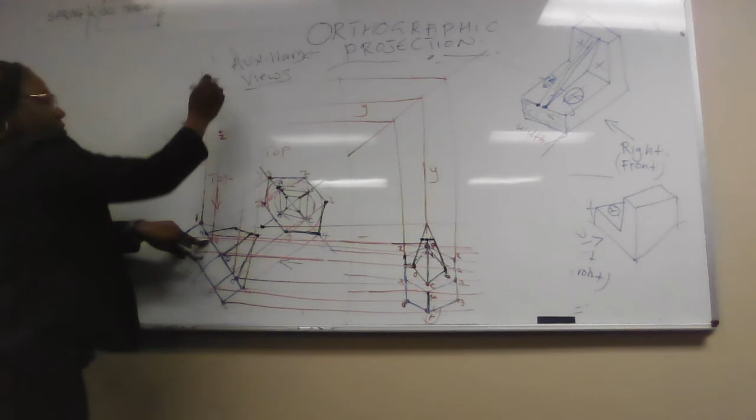You can either take that distance, come here, you mark, or go back here and get 2. 2 is here, 245. There's my other 2, 245. Where are they meeting with these 2? Here and there. You got your 2 and the other 2. Then you go to 3. There's 3 going up. Where is 3 here? 3 and 2 together, you can see. 3, 3. The other 3 is on the other end. Then 4. 4 was on the Y line. 4.

Done. Looking from the top, this is going to be solid. Though it looks off, it must be the same shape. So let's just fix it so it looks normal there, straight there. Then this line here must come straight to there. Yeah, it was 3 and 2.

Can you have this mark back, please? Yeah, I just want to finish now. Okay, so you're done with that, then we can do the bottom one.

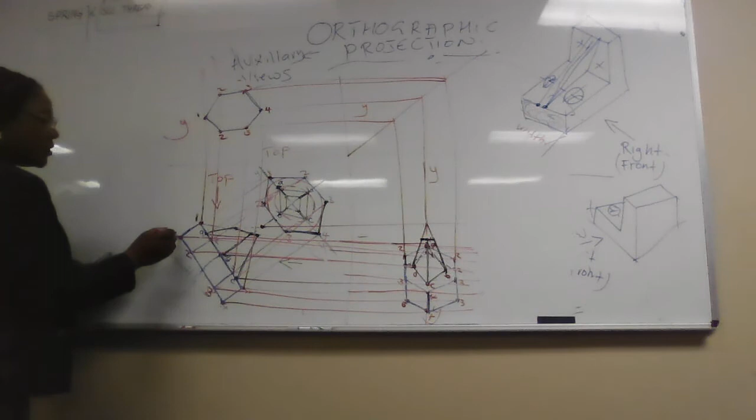The bottom one is number 1, number 2, 3, 4. You come here, number 1, number 2, 3, and then 4.

So if I'm looking for 1, it will just be below this one here. There, number 1, because the other one was here. Then number 2, I'll go up, and then in line with that 2, I get 2 here. And on that end, I get 2 here. Number 3, 3 here, and 3 here. Number 4 at the bottom is on the center.

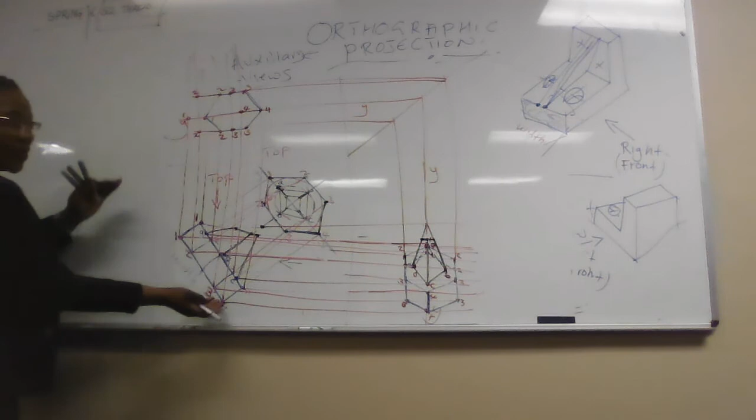There is number 4. And already I said we are only going to see 3 to 4, but now you're looking from the top, so you see which one. The 1 to 2 and 2 to 3. You understand the highest point, you won't see the lowest point. In short, we see the outside part. It's how this one goes here, and how it goes there, and how it joins there.

Then the inside one from 2 to 4, from 3 to 4, it's hidden details. What else? How 1 goes to 1, because you're on the top, you will see a solid line here. How 2 goes to 2, you have already done that, 2 to 2. The only one you won't see is 4 to 4. Where is 4? There is 4 to 4 here. That should be hidden details.

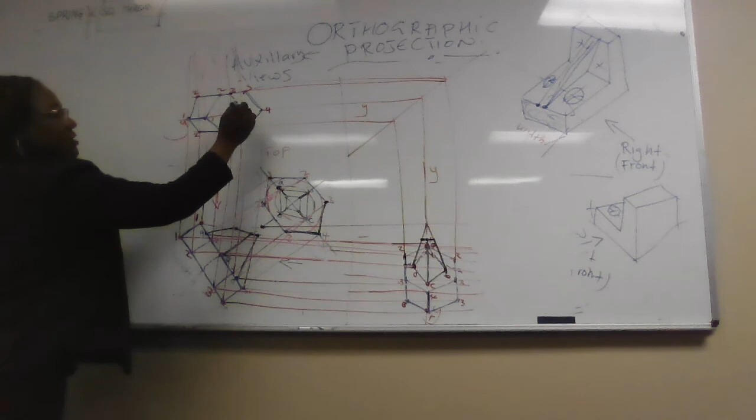So we have created the bottom. I'm coming to do the other one after break, just to finish up on this one, because what we have created is the base. Then after break, maybe 10 minutes talk, then I'm done. I like talking and then finishing, then you can practice.